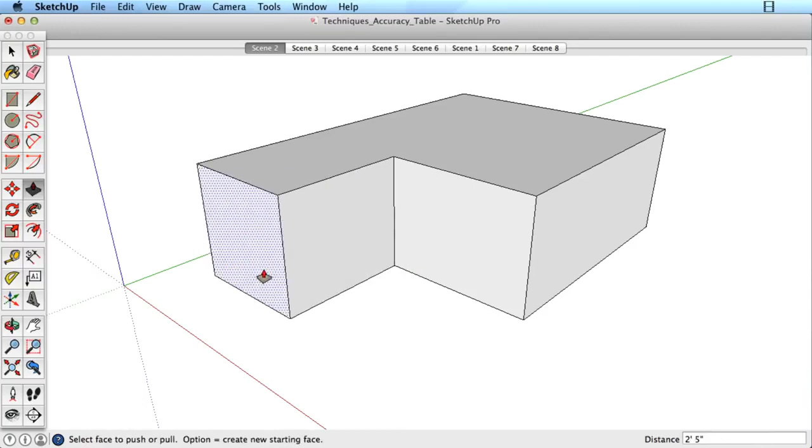SketchUp allows you to be so creative with your ideas that many users do not realize how easy it is to be accurate as well. Here is an overview of ways to work with accuracy in SketchUp. Most tools will respond to keyboard input.

For example, start drawing a line in the direction you need, and before clicking to finish the line, type in a numeric value on your keyboard and press the Enter key. The default value is likely in inches or centimeters, but you can specify the unit of measurement. Continue drawing lines and typing different values.

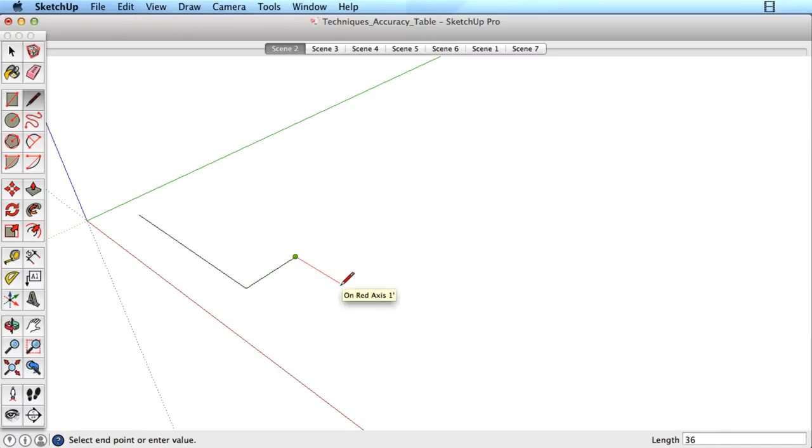I'll type 2m for this line, meaning 2 meters. Then continue in this direction and type 6' for 6 feet. I can also use 25 cm for 25 centimeters. Other drawing tools also respond to keyboard input.

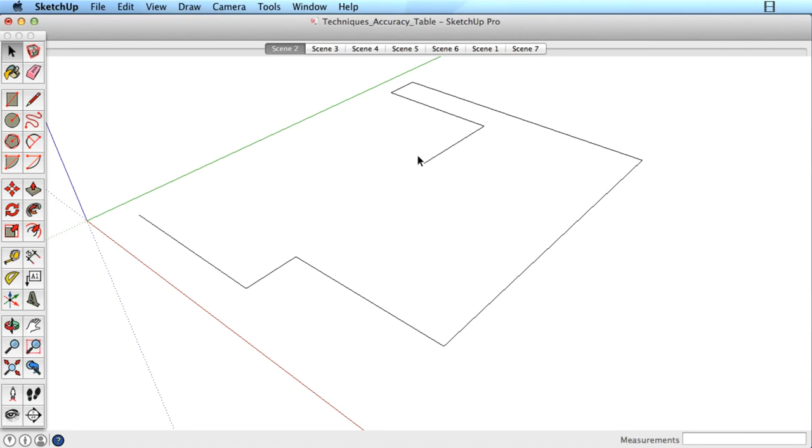For rectangles, specify the length and width separated by a comma, such as this example. Draw a rectangle of any size, then type 3m, comma, 5m to create a rectangle that is 3 by 5 meters.

When entering dimensions, you can also use fractions or decimal points. For example, type either of these dimensions into SketchUp to create a line that is 12 foot 5 3/4 inches long. Remember to use a space between the whole and fractional measurements. For the circle, polygon, and arc tools, you can specify an exact radius for that shape.

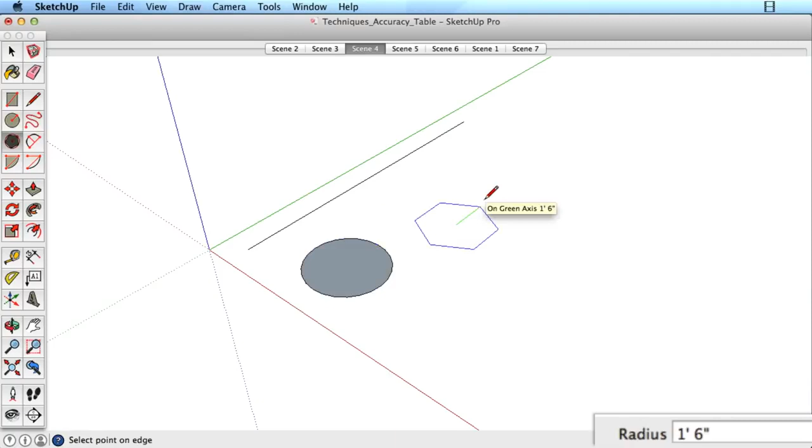You can be accurate while using many of the modification tools as well. Pull a shape and type in the exact distance you need. When specifying a distance for the Push-Pull tool, remember that the distance is always measured from the initial location of the surface and relative to the direction of the push-pull operation.

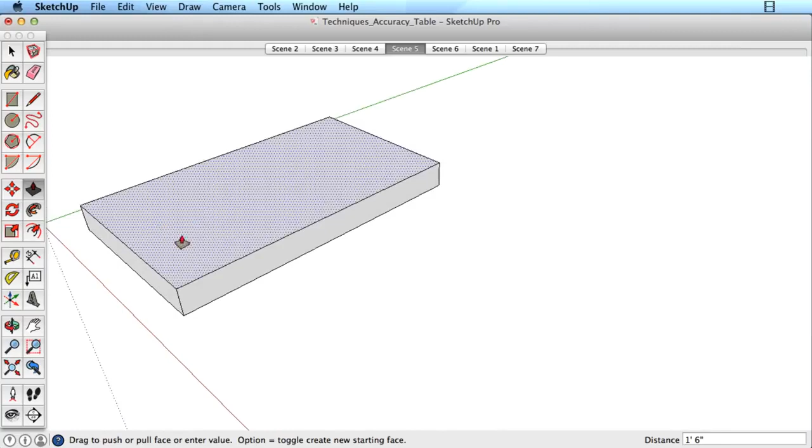For example, by pulling on this surface and typing 5 feet, the surface is moved exactly 5 feet in that direction. But if we push the surface in the opposite direction and type 5 feet again, it moves back to the original location.

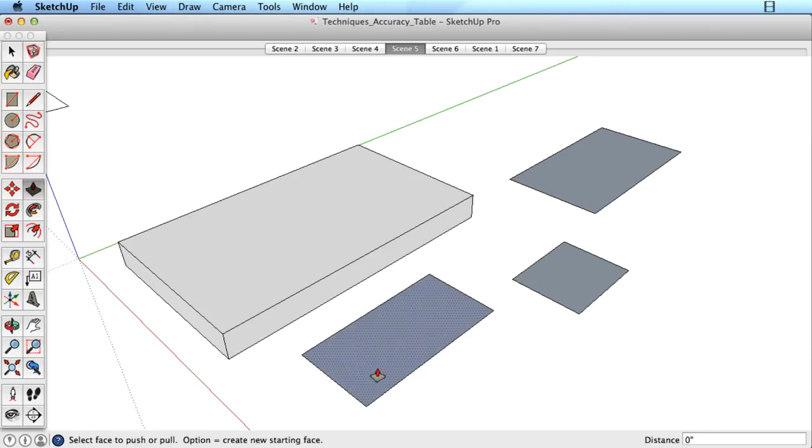Here's a tip for being accurate and fast with the Push-Pull tool. Every time you use Push-Pull, SketchUp will remember the distance you used. Look at these 3 rectangles. Pull the first rectangle out a distance of 12 inches. Then simply double-click on the next rectangle and the third rectangle to have the Push-Pull tool use the same distance.

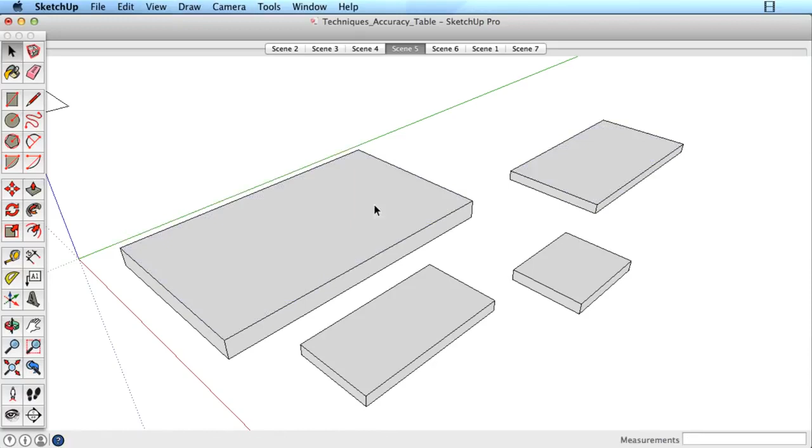Push the top surface down a few inches and then double-click on the other surfaces to get the same distance. This functionality works on any surface you double-click on. The Offset tool also lets you specify a distance. Simply begin your offset outward or inward and type the distance you need. Double-click on additional surfaces for the same offset distance.

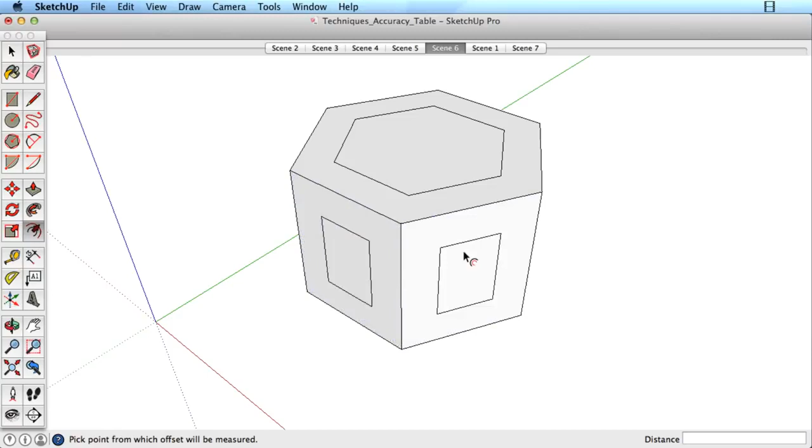By now, you should have a good idea of many ways to be accurate in SketchUp. You can also specify exact distances when moving objects and exact angles for rotating objects, all with keyboard input. Another way to be accurate is to create guides for you to reference. These guides are created with the Tape Measure tool.

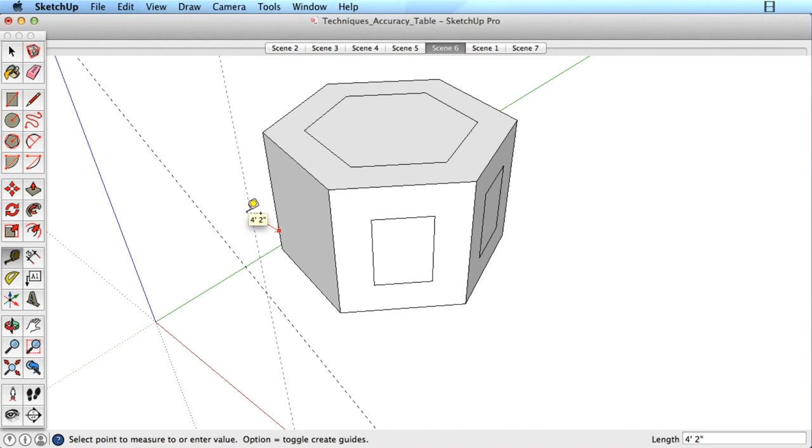Simply click on an edge and pull away to create a reference guide. Remember that you can type in a distance for this guide. For example, I might pull off several guides at 12 inches, so I know where to move the legs of this table. To create a specific point of reference, click on an endpoint and pull away.

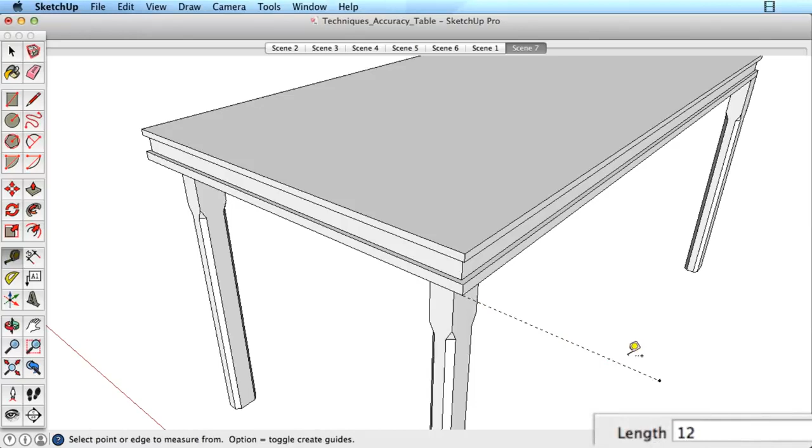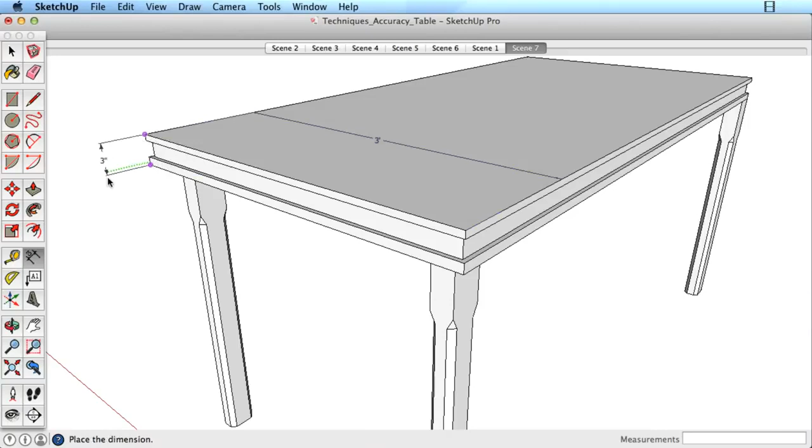You can also create guides with the Protractor tool for accuracy with angles. The tool snaps to every 15 degrees, or you can type in a desired angle. When you have created models that need to communicate measurements, use the Dimension tool. You can pull dimensions off edges or between any 2 points, and even off arcs and circles to show the radius.